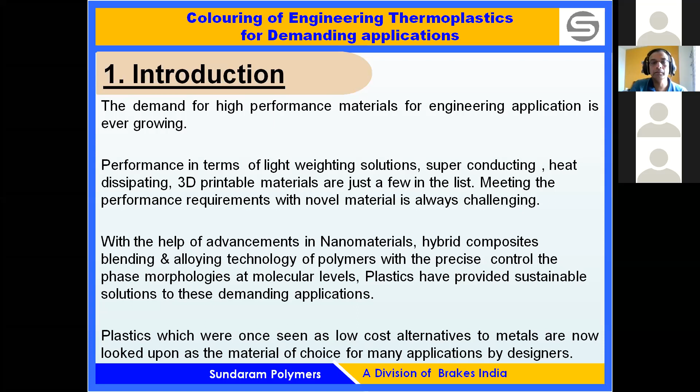So coloring of plastics is one of the key requirements from the industry. It is necessary from both the aesthetic and functional aspects of the part. The advantage of plastic over other materials like wood, metal, and ceramics is its ability to produce molded-in color parts, which helps eliminate secondary coloring operations and reduce the manufacturing steps.

It may result in significant rejections of the part, leading to higher part cost. Hence, coloring is one of the key parameters, just like dimensions and other properties, which needs to be closely monitored and controlled during the manufacturing process.

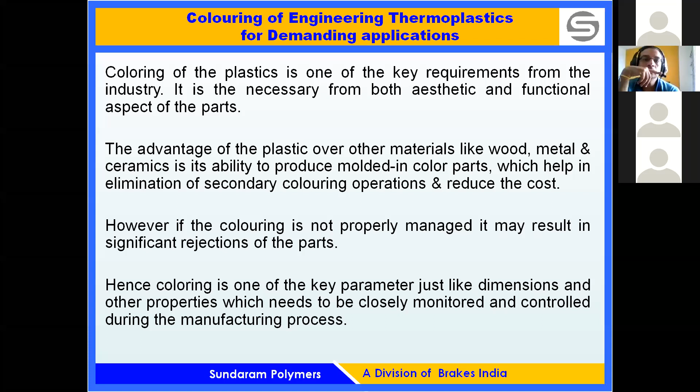By the way, what is color? Color is a perception of the human eye, which allows us to distinguish objects. It is basically caused by the interaction of the object with the electromagnetic spectrum in the visible region, that is, the wavelength region of 360 to 780 nanometers.

We all know the experiment where a white light passed through a prism gets dispersed into different colors. We call these rainbow colors. These rainbow colors have a characteristic band in the visible region; below 360 is called UV, and above 780 is called IR radiation, which is not perceivable by the human eye. A white light is known to consist of a mixture of all the colors in these wavelength regions. So how does an object appear colorful?

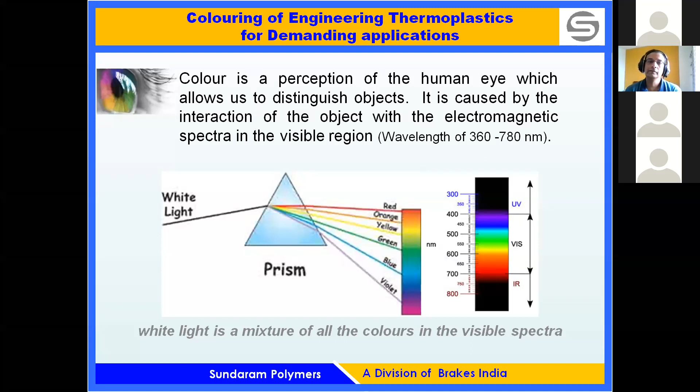An object appears colorful due to its characteristic of predominantly absorbing or reflecting particular wavelengths of light in the visible region. For example, when a red object is illuminated with white light, the object predominantly reflects the wavelengths in the red region and absorbs all other wavelengths.

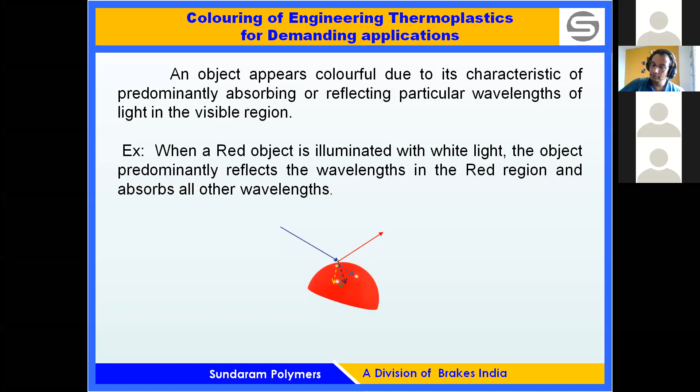Suppose the object is transparent, then the color of the object differs. A white object appears white because it reflects all the wavelengths in the visible region, while a black object appears black since it absorbs all the wavelengths.

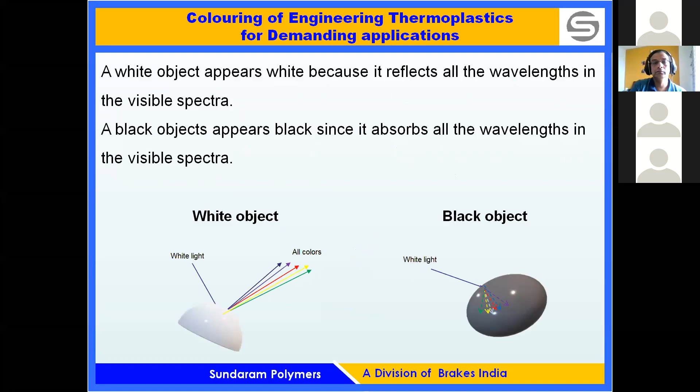The light source is very important in characterizing color. If a green light is illuminated on a red object, all the light gets absorbed by the object and the object appears black.

Since the source of light does not contain the spectrum in the red region, all the light gets absorbed. And if the same red light is illuminated on a white object, the object appears red since the object reflects only the red light in the spectrum.

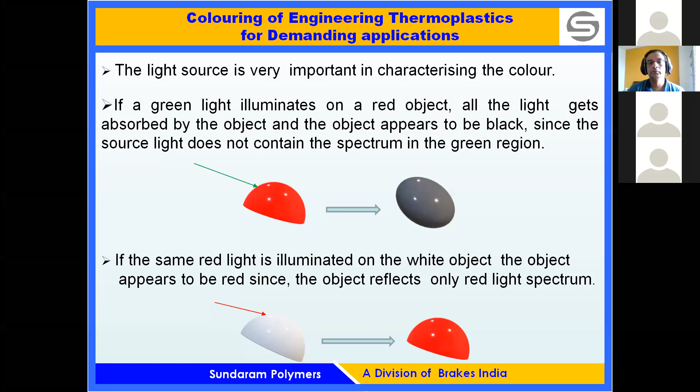So how do we come to the part of color measurements? Color can be assessed both visually and measured instrumentally. The basic requirements to assess color are a standard light source, an object, and an observer. As we said, color is a matter of perception.

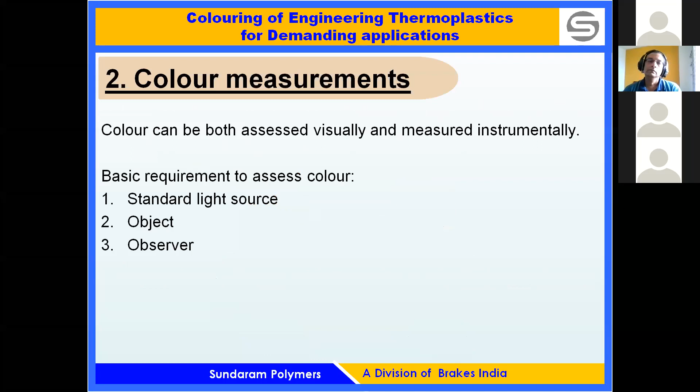Color can be described basically with three terms: hue, lightness, and saturation. Hue is the term which refers to the common sense of colors, like primary colors, which we call red, green, and blue. While saturation refers to how pure or intense a hue is.

The second attribute, lightness, is the term used for how bright a color is. For example, if it is a dark or lighter shade or a whiter shade, that can be expressed in terms of lightness. Any color can be described best through these three attributes.

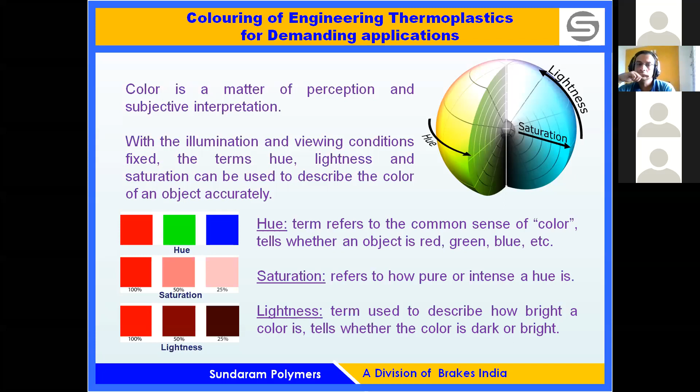This is common in everyday applications, because the human eye is involved in selecting colors. So there are basically international standards which guide how color can be measured.

The best way of visual assessment of color is to evaluate it in a color booth or color room. The color cabinet should be equipped with illuminants like D65, CWF, and TL84, which simulate average daylight and cool white fluorescent lights, representing the various lighting conditions under which the product can be viewed in normal life.

The cabinet should be painted in a neutral gray color to avoid any distractions, at 0 degrees and 45 degrees. Some basic tips for how a visual assessment of the colors can be done: keep the color booth and the illuminants clean and dust free.

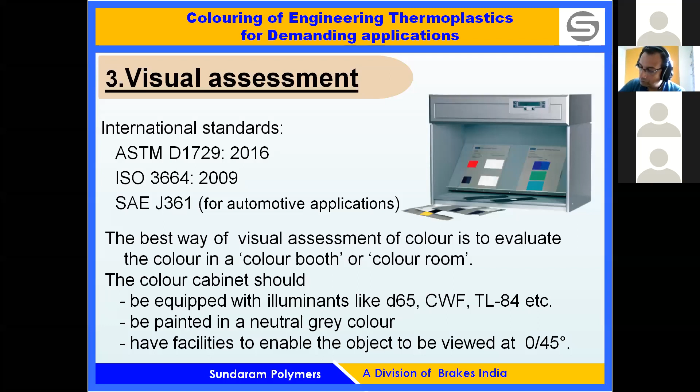The interference of dust or dullness in the light illuminant can cause a color variation, and color can be misperceived. Do not keep any other article or objects in the color booth which may distract the eye.

Keep the samples side by side with the same texture, because a difference in texture can cause perception issues. If you are comparing different color shades, start with the lighter shades and then go for saturated colors. The moment we see saturated colors, our eyes get more strained, so we have to start with the lower, less saturated, lighter shades, and then go for the more saturated colors.

Do not view the color shades continuously. Take a break in between to provide rest to your eyes. Compare the color standards and the samples with more than one light source. Sometimes metamerism in colorants can result in color mismatch.

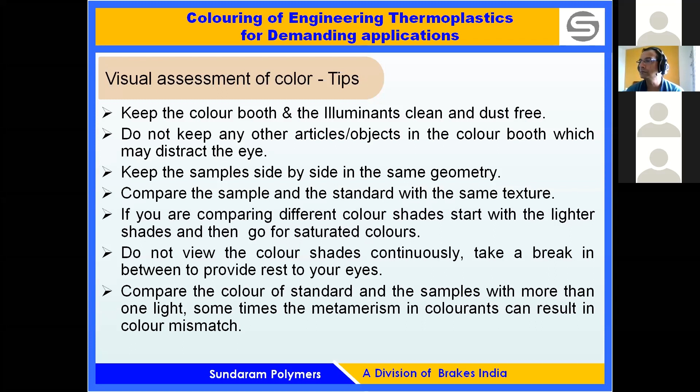What is metamerism? Metamerism is a phenomenon where the color of two parts matches under one set of observer and light source conditions, but appears different when the observer or light source changes.

There are three major types of metamerism encountered in plastics. First is observer metamerism, which is caused by the different levels of perception by the eye, which receives the similar reflected light from the object at an angle of 2 degrees from the fovea of the eyes.

Around the fovea, at 2 degrees, there are color receptor cells called rods and cones, which receive the reflected light and send neural signals to the brain to recognize the colors.

Earlier, when CIE established the standard observer, it was 2 degrees. Later, in 1964, we discovered that the distribution of these rods and cones extends around 10 degrees of the fovea. That means the light reflected from the object is also standardized for a 10-degree observer.

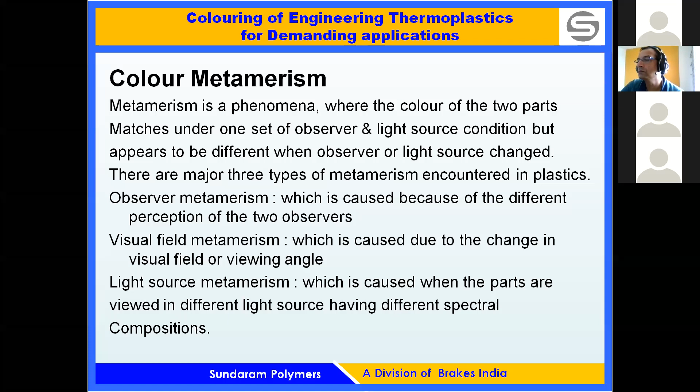So, visual field metamerism is caused due to the change in the visual field or viewing angle. And light source metamerism is caused when the parts are viewed in a different light source having a different spectral composition. As I said earlier, the source of light dictates how the color is perceived by individuals.

Instrument measurements are done to avoid some of the anomalies in visual perception. Here, the colors are quantified based on the same three parameters: lightness, hue, and chroma. Measurement principles are carried out through a spectrophotometer, which is the instrument used to measure the color of an object.

Measurements of colors are commonly done on two scales: Hunter Lab and CIE L-star A-star B-star scales. The measurement is based on the 3-component color theory, according to which the eye possesses receptors only for the 3 primary colors: red, green, and blue.

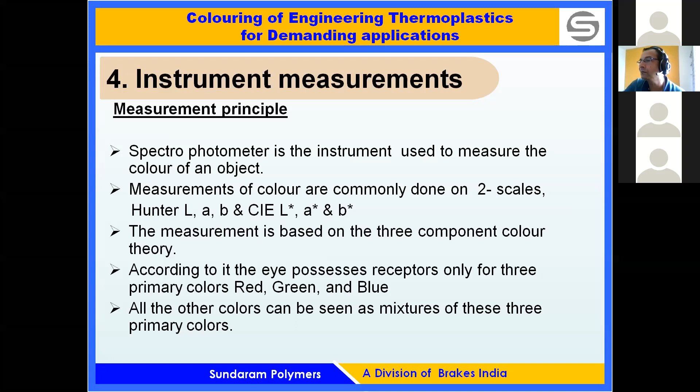So the color of any object is described using the tri-stimulus color values related to these 3 primary colors, which we call X, Y, Z. The tri-stimulus X, Y, Z are calculated from the reflectance spectra of the object, which shows to what extent the object reflects each wavelength. Plotted against wavelength, this is called the reflectance spectra.

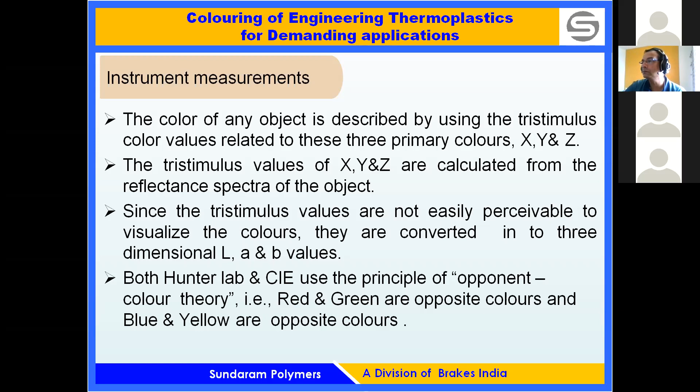Since tri-stimulus values are not easily perceivable for visualizing colors, they are converted into 3-dimensional L, A, and B values. Both Hunter Lab and CIE use the principle of opponent color theory, that is, red and green are opposite colors, and blue and yellow are opposite colors. This is how color is depicted in the 3-dimensional coordinate system.

A vertical line represents the lightness of the color, as the L value. An L value equal to 0 means the object is perfectly black, and an L value equal to 100 means the object is perfectly white, reflecting 100% of all wavelengths of light. But in practice, we don't encounter such objects with L equal to 100 or L equal to 0.

Normally, as the L value rises above 50, it indicates lighter shades. As the L value goes below 50, it indicates darker shades. Similarly, the A value dictates redness or greenness: A positive indicates the sample has a redder shade, and A negative indicates the sample has a greener shade.

So suppose any color has LAB values depicted, a negative A value means we can immediately perceive that this is a green shade. B positive indicates the sample is a yellower shade, and B negative indicates the sample is a bluer shade. So you can see the visualization of color 1 on the first quadrant, which is a reddish and yellowish shade, while color 2 is having a bluish and greenish shade.

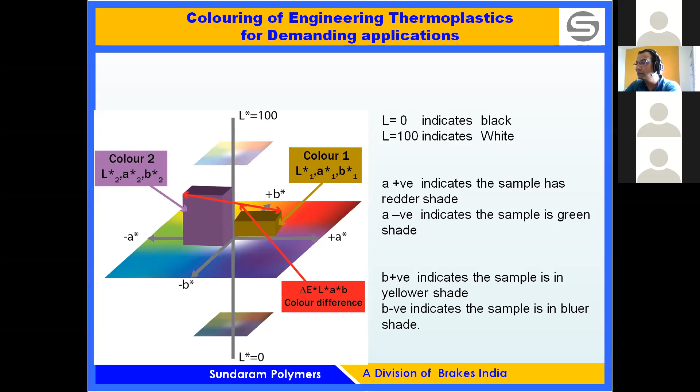Instrument measurement's operating principle is that light from an illuminant of known spectrum in the visible region is passed onto the object at a constant angle. The object reflects and absorbs the spectrum at different wavelengths depending on its color. The amount of light reflected from the object is then passed through a grating, which splits the light into different wavelengths. Reflectance is then plotted as a reflectance of the object.

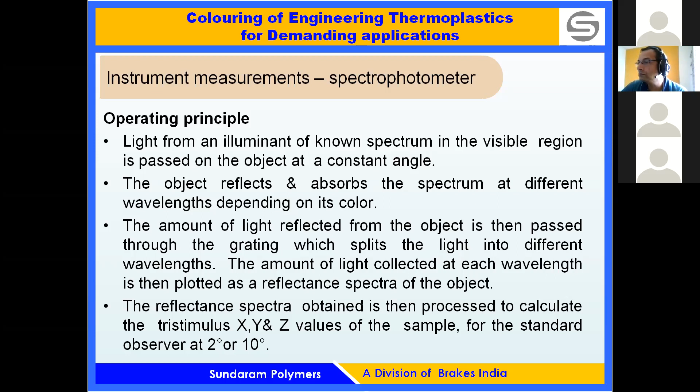The reflectance spectra obtained is then processed to calculate the tri-stimulus XYZ values of the sample for the standard observer at 2 degrees or 10 degrees, depending on the requirements. These are some of the illuminants which are used in color measurements, both in the color booth as well as in the instrument.

Illuminant A is normally a color description like incandescent light. Illuminant D65 is a moderately blue color and represents the average daylight of the noon sky. Illuminant D50 is white, a noon skylight we normally encounter every day. Illuminant D75 represents north sky daylight, and it is a moderately deep blue. The latest illuminants include cool white fluorescence, warm white fluorescence, and also TL84, which is used for showcasing objects in shops and other places.

Now even LED lights are also standardized in the latest standards.

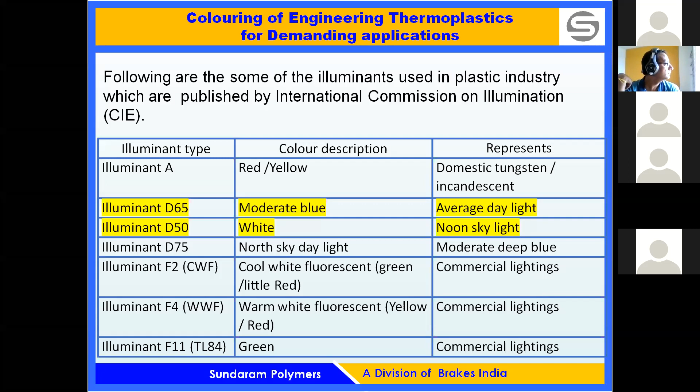D65 represents the average daylight, which is the commonly used light source for color measurements. It is a specified daylight source in ASTM and SAE standards. D50 represents the average noon skylight, which is a specified source as per ISO 3664:2009 standard. Of course, software is available to convert the measurement from one light source to another, and also calculate the metamerism due to the change in the light source.

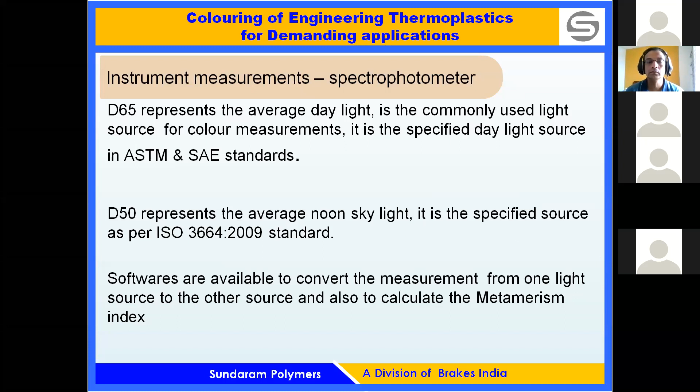So, understanding the color difference: the difference between the color of two objects or samples can be expressed numerically in a single term as delta E star and delta E CMC.

These are the two different sets of measurements, the standard and the sample. Color difference is calculated by subtracting the color values of the master from that of the sample, leading to delta L, delta A, delta B. Delta E between the two shades is expressed as a single numeric value: delta E star equals the square root of delta L squared, delta A squared, and delta B squared.

This is a theoretical calculation. Nowadays software can automatically give you the values of delta E star and delta E CMC the moment it measures the standard and the samples.

Delta E star represents more of a rectangular space around the standard, whereas delta E CMC represents more of an elliptical color space around the standard. The overall deviations are assessed based on the rectangular or elliptical difference between the object, the standard, and the sample.

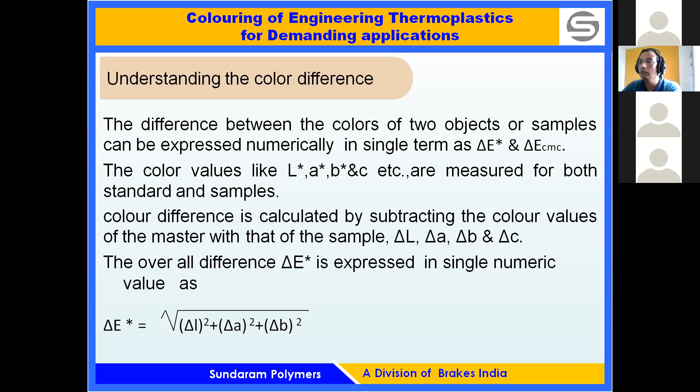This is a normal color report. Here we have measured the color value of a signal yellow standard, which is nearest to RAL shade RAL 1003. Signal yellow has an L value of 77.05, an A value of plus 20.15, and a B value of 71.82. We can see that the L value is above 50, approaching the nearer 100 scale.

So the shade of the color is lighter, and A is positive, which represents a yellow-red shade, while B is 71, which says it is highly saturated with yellow. So the typical shade can be viewed as lighter, redder, and yellower.

Against it, we have a fiber matching this signal yellow color, which is an RoHS compliant material. We have been able to achieve delta E of less than 0.5, against the industry standard requirement of less than 0.1 to less than 1. And delta E CMC is also less than 0.18. So it is a very close match, as you can see visually between the standard and the sample.

Delta L, if positive, then it is a lighter shade. Delta A, if negative, then it will be a bluer, greener shade. And delta B, if negative, it will be on the bluer shade. So we can say that the match is slightly lighter compared to the standard, and blue is almost matching to the standard, and yellow is almost matching to the standard. So this is how the normal color report looks.

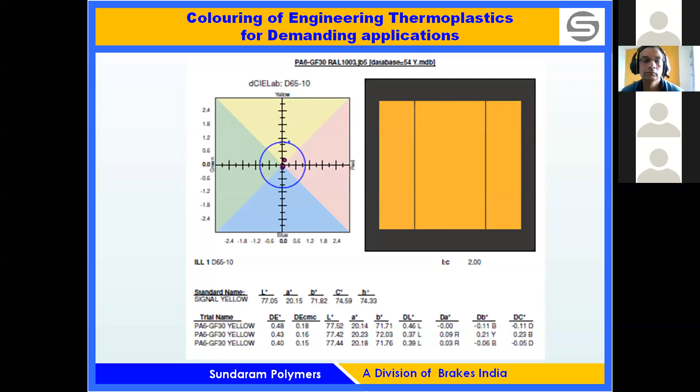Coming to the coloring challenges for the engineering thermoplastic. Engineering thermoplastics have unique requirements when it comes to coloring. Some of the challenges we encounter during the coloring of engineering thermoplastics, the basic thing is the thermal stability of the colorants.

The stability of the color should be such that it withstands the stringent high temperature processing conditions which engineering plastics normally undergo. Chemical compatibility with polymers is important. The pigment chemistry and the polymer should not be reactive, or at least should not react negatively. At least it should be neutral, which would be preferable.

Then weatherability of the pigments and the polymers, because when articles are put into use under stringent weathering conditions, normally the polymers and pigments tend to deteriorate. So the life of the object or part will come down. Hence it is important that the weatherability of the pigment be very high.

Addition of fillers like glass fiber, mineral fillers, etc. will reduce the saturation levels of the color to be achieved. Hence that also has to be considered while formulating the color.

Additives added to achieve functionality like flame retardancy, antistatic properties, conductivity, and lubrication all contribute to the saturation and shade achieved in the color. So we need a careful choice of pigments which can withstand all these and still provide good saturation levels. Processing conditions, component geometry, texture, gate designs, weld line formations, and warpage issues also matter.

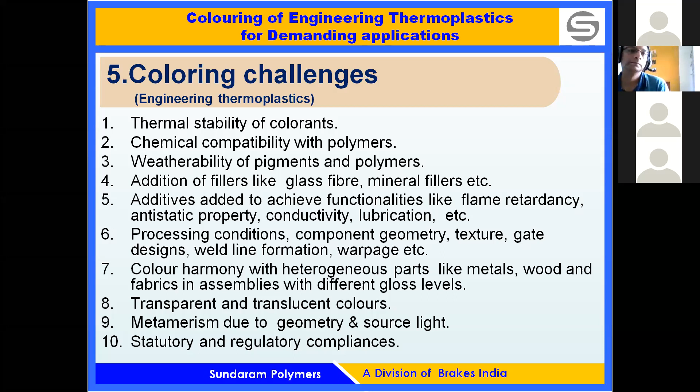And statutory and regulatory compliance. This is also one of the important things to consider because some metal oxide pigments, like in Europe and USA, cadmium-based pigments, lead, mercury, and hexavalent chromiums, which are all quite used in industries for coloring, are not acceptable either in the electronic industries or in the automotive industries. So these are some of the challenges which happen.

Coming to the customer expectations on this, the color has to be made. The customer expectation is that the color has to be matched accurately and quickly, as closely as possible, like delta E — even though delta E now less than 1 is universally acceptable.

The customer expects to match the level to a delta E of less than 0.5, because the idea is to have as close a match as possible — that is the key.

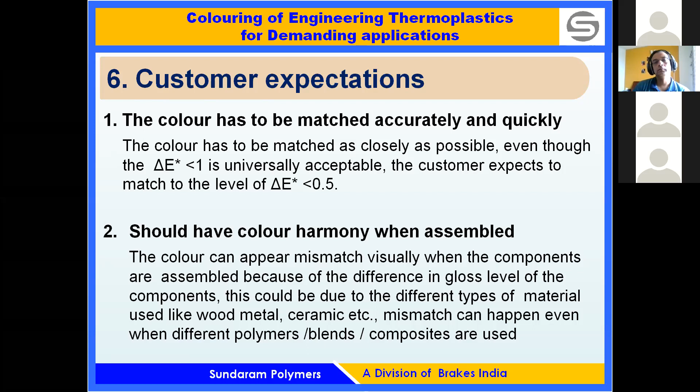Colors are sometimes assumed to mismatch because of the difference in gloss levels of the components. This could be due to different types of materials like wood, ceramic, etc. Mismatch can happen even with different polymers and blends or composites used.

For example, a typical sun visor assembly is made of 4 different materials like PP mineral filler, nylon 6 glass fiber, polyacetal, and ABS. Each will have its own different gloss levels and textures. So when we make an assembly, the color has to be in harmony and show uniformity, and it should also be uniform with the fabric of the roof.

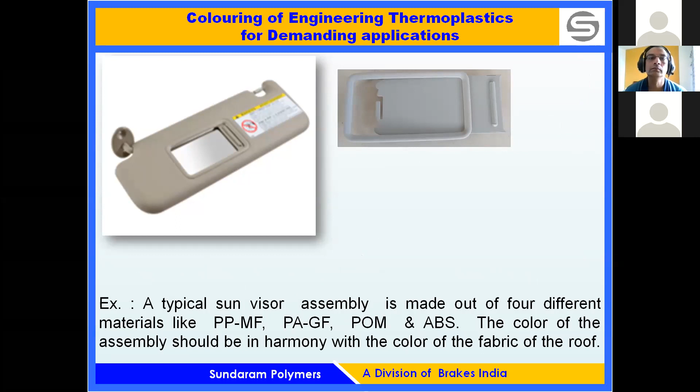That is the expectation from the customer. Consistency from lot to lot is also very important, as the customer buys in batches of the plastic material or a pre-compounded material. The continuity of the lots has to be ensured, and the uniformity of the color should be maintained, to ensure continuity of supply of parts and assemblies and avoid mismatch of the assembly parts.

Minimal effect on other properties is important. The colorant acts as a contaminant and has a negative effect on the compound properties like mechanical, thermal, rheological, and flame characteristics.

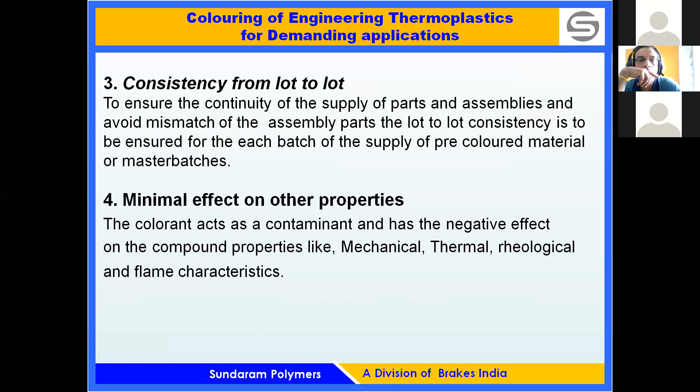We should have a very good weather fastness. The color has to last long. Plastics tend to embrittle, fade, or change when put into service conditions. Yellowing can happen when exposed to the weather during usage. The action of UV light, humidity, and temperature together causes this effect on the plastic. The expectation from the colorant is that it should not fade off or decolor during the service of the part.

Ease of processing is another customer expectation. The processing of the colored product should be user friendly. When you are using it for processing a pre-colored material, it should be user friendly and should provide a wide processing window, because there should not be any rejection on account of the coloring.

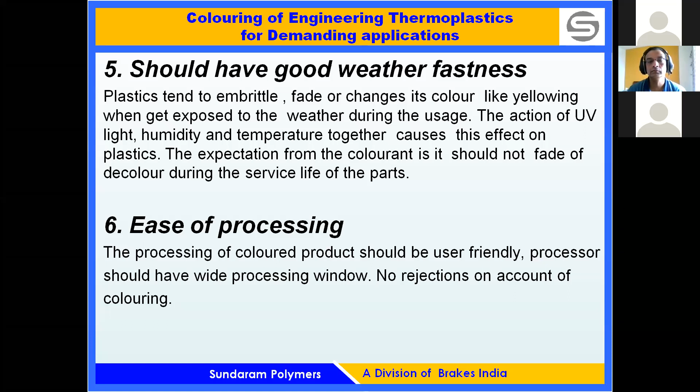Statutory and regulatory requirements is one of all levels, I think a very basic fundamental requirement for any coloring applications. The colorant should be compliant to European standard regulations like RoHS, REACH, ELV, GADSL. The colorants can be one source of hazardous elements, as the usage of heavy metal pigments from cadmium, lead, mercury, and hexavalent chromium are classified as hazardous under RoHS directives. Pigments made from these metal complexes are very attractive because of their outstanding performance in terms of thermal stability and consistency, and also low cost.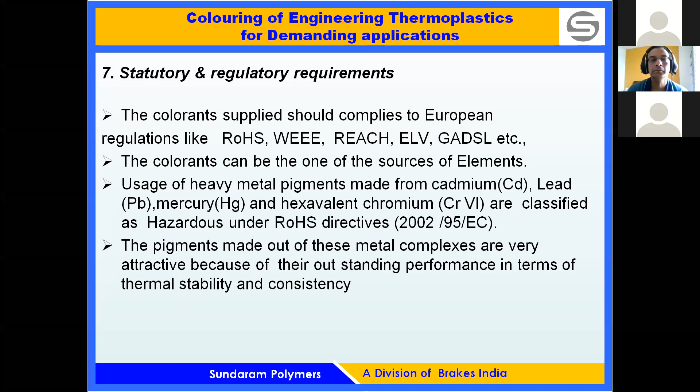Sundaram Polymers has expertise in coloring solutions for engineering thermoplastics. We provide accurate color matching quickly. A wide range of colorants are available in our inventory, used with state-of-the-art color matching instruments, with more than 2,000 shades available across a wide range of polymers like nylons, ABS, POM, polycarbonates, PBT, PP, and alloys of nylon with ABS, PC, PBT alloys. These are some of the alloys where, as pre-colored materials, we have been able to supply consistently. We have a dedicated compounding line and molding machines to produce small batches quickly with accurate match.

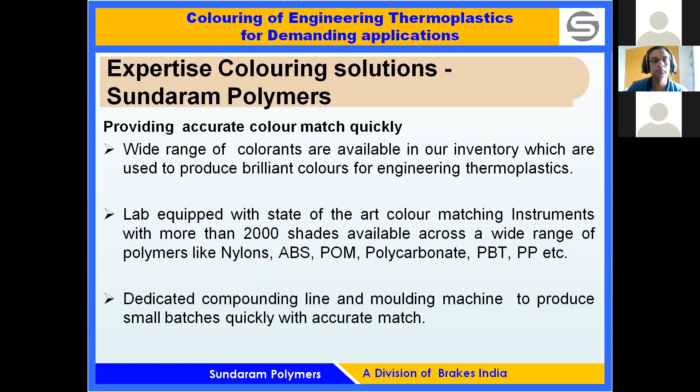BIPL-SPD has the capability to produce color compounds under strict process control conditions. Control on the quality of incoming raw materials like base polymer and colorants is established. Quality checks are done periodically with first-off approval done both instrumentally and by visual judgment. Upper and lower controls on the run chart for individual LAB parameters are ensured. Additionally, our customers are assured of color consistency with the color swatch supplied along with the color report for each supplied lot.

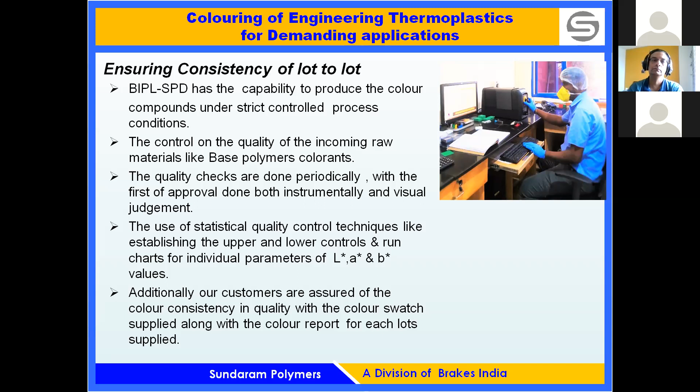Ensuring color harmony among the assembly parts, we are offering a one-stop solution for coloring, having various engineering thermoplastics in our product range. With close coordination with OEMs, we achieve color harmony among the various polymers, different classes of polymers, when assembled.

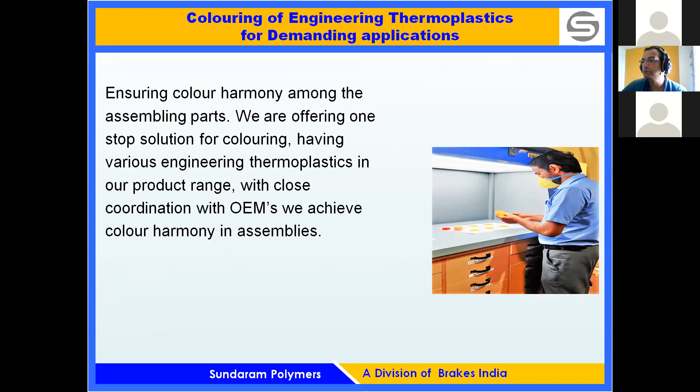Minimal effect on other properties like mechanical and thermal properties is ensured. With the range of pigments and master batches available in the inventory, color matching is done with expert choice of pigments to ensure minimal effect on these properties, also ensuring the dosage of colorants is kept as minimal as possible to avoid any side effects.

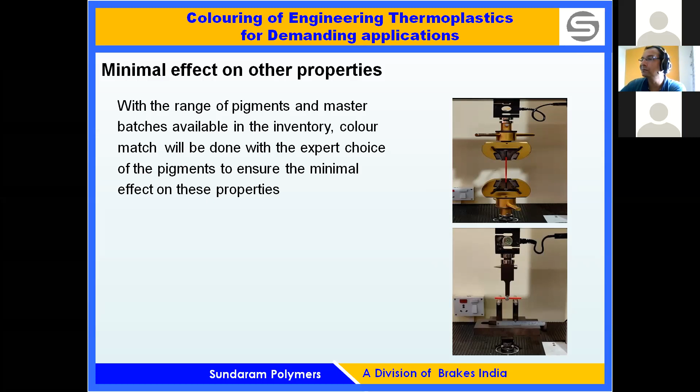Should have very good weather fastness. To protect the polymer, usually thermal and UV stabilizers are added, while to avoid color change and fading, the choice of pigments plays a crucial role. Pigments with light fastness of 7 or 8 are selected for coloring. Pigment performance is rated on the light fastness scale of 1 to 8. You can see the picture where the difference between the light fastness rating of 1 and 8 is shown. Normally we use a grade of 7 and 8, which can withstand weather conditions, even stringent ones, for long lasting results.

You can see the light rating of 1 has a complete change in color, while when you see the rating scale of 7 or 8, there is almost no change in color when compared to normal comparisons.

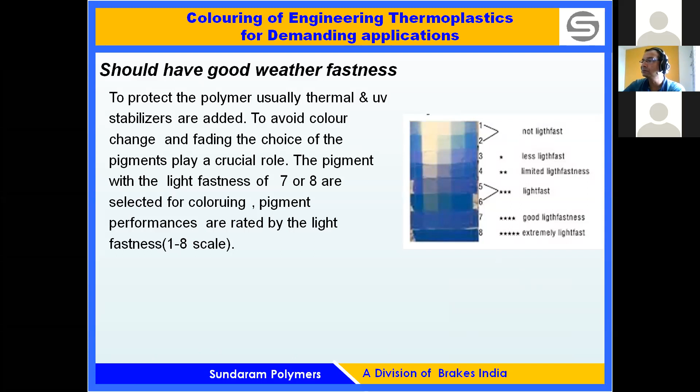Ease of processing is another requirement from the customer, where BIPL-SPD technical service engineers visit the customers during trial and pilot batch supplies and help them optimize the process parameters to ensure component qualities are met as per their established standard. The statutory and regulatory requirements of the colors used by BIPL-SPD are compliant to RoHS, and the thermal stability and color consistency of the pigments are ensured to meet the processing requirements of the molder.

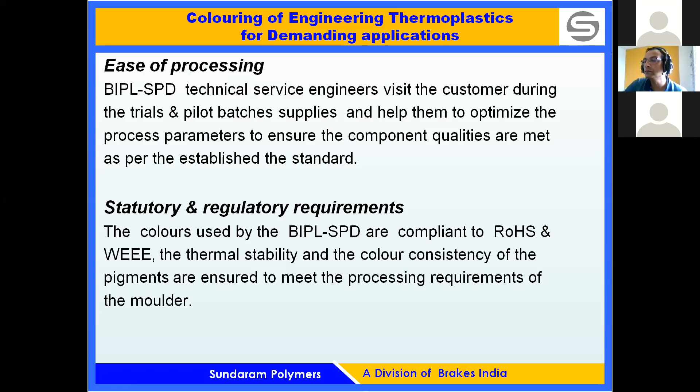We produce flame retardant grades with halogenated and non-halogenated flame retardants, heat stabilized grades. Our flame retardant grades are REACH compliant, heat stabilized and lubricated with molybdenum sulfides, PTFE, or silicones.

Similarly, in the polycarbonate range we have unfilled, glass fiber or glass bead reinforced, and flame retardant grades, and more importantly, different PC/ABS alloys. We also have PC/ASA in our range with various UV stabilizers, and flame retardant grades available here too, both halogenated and non-halogenated.

Electrical applications such as energy meters, and automotive applications such as filter body and miniature circuit switches, are being used for these products. In PBT and PET, we have flame retardant, heat stabilized, unfilled, and glass filled reinforcements, the majority going for automotive applications like ignition and carburetor parts.

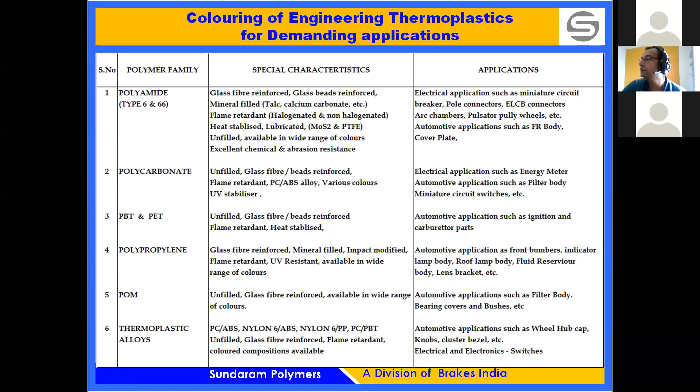The alloys, as we said, PC/ABS, PC6 alloys, and nylon 6 alloys, are all again UV stabilized and reinforced grades available. Some of the product applications go to automotive, white goods appliances, electrical and electronics, telecommunications, defense, and other engineering sectors. We have our unwavering commitment to quality.

TPM has been adopted as a way of life in our organization. We are recipients of TPM awards in 2005 and 2007 for consistent categories. Our quality management systems are accredited to IATF and ISO.

Environmental management systems are accredited to ISO 14001, and occupational health hazard and energy management are also certified in accordance with ISO standards.

This developed component has been used for power tool applications, where we have two assembly parts, case filled and housing. It is basically nylon 6 with 30% glass fiber. The feature of this is UV stabilization for 1000 hours.

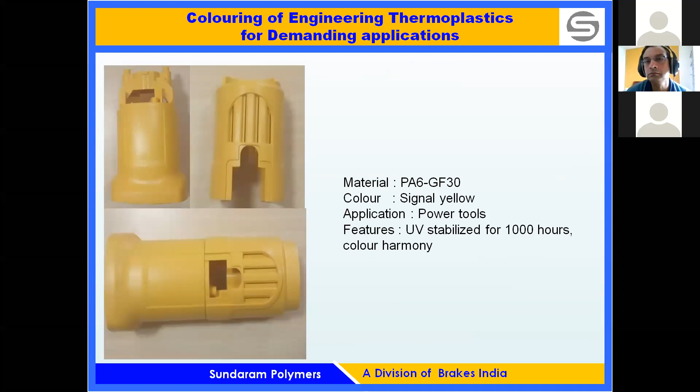Another important thing is the color harmony. The parts are molded at two different times, and when assembled, they should look uniform.

This is another one in the nylon 66 category, glass fiber reinforced. We have two different colors, green and blue, for automotive fuel caps, radiator fuel caps. It is basically a glycol resistant grade.

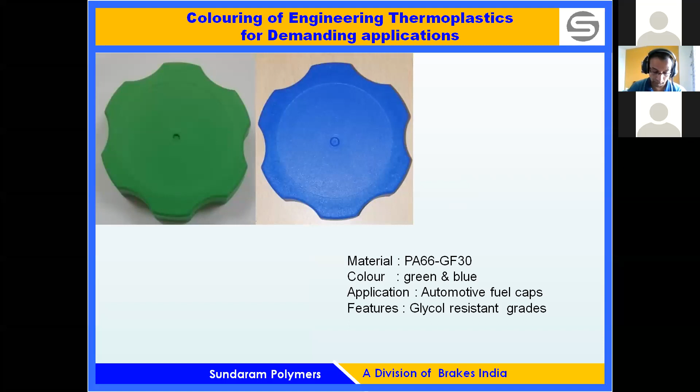This is one combination of components we supply, reinforced with FR grades, with non-halogenated FR grade for electrical application, in different colors like blue, pink, and red. It has been assembled as a single switch for our customer. This goes for an electrical hazard activator assembly.

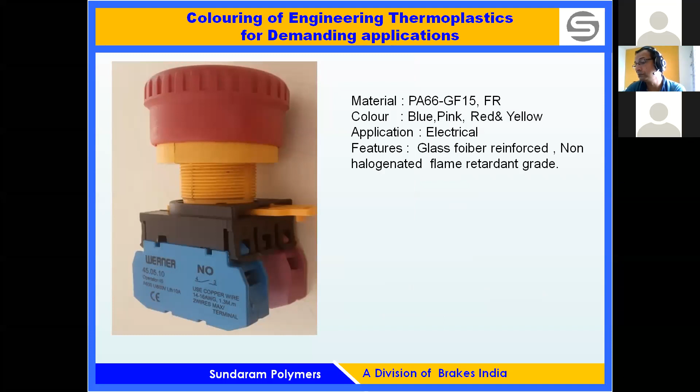This is the PC/ABS alloy used for seat garnish application. The key feature is consistency of the color, red and brown background. The application is for the seat garnish, and the key feature is that it is hydrographically painted.

Texture painting has been done on this. The key requirement is that the alloy, the molded part, should have color consistency. Otherwise, texture variations come into play.

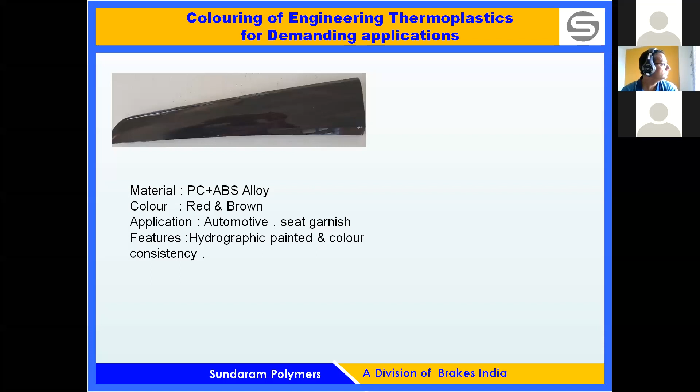This is the laser marker. We have it in black, blue, and different custom colors, where we can mark any information on the parts using a laser beam. We develop custom-based colors for laser marking with blue, green, yellow, and other contrasting colors. This is basically a laser marking as well as heat stabilized grade.

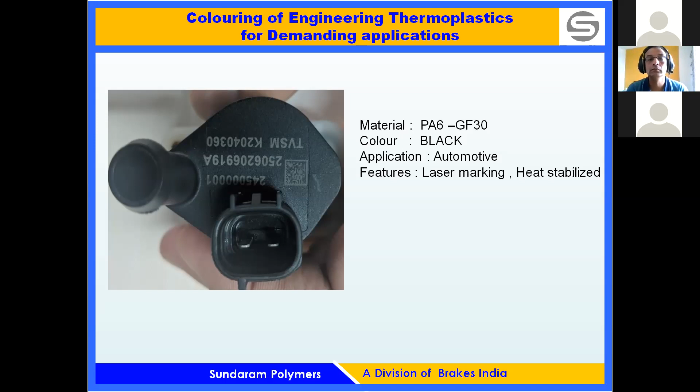This is some of our existing customer base. We supply to all major automotive OEMs and also auto electricals.